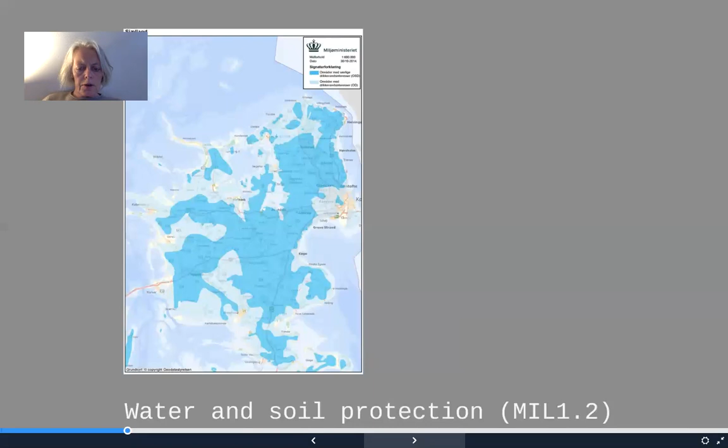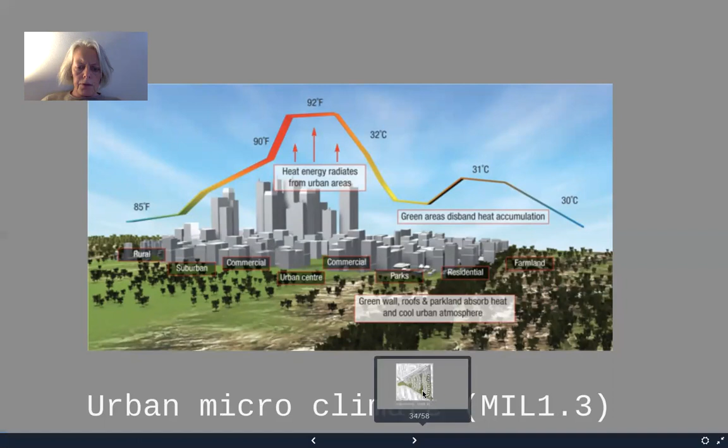The urban microclimate plays a role. We have already been touching upon this when we talked about the heat island effect, the fact that it is warmer in the cities because of all the hard surfaces. They collect heat, and when you have an area in a city that is too warm, then you will have to cool the buildings and use energy for cooling these buildings. So if you can work to actually avoid the heat island effect, then you may also get a higher return in terms of solving environmental problems.

Biodiversity is another aspect. If you can secure a high level of biodiversity, you will also promote the possibilities for producing more vegetables and food in this area. So a strategy in terms of design thinking that promotes all kinds of greenery, facade, plants, trees, bushes, and whatever that support each other in terms of creating a rich biodiversity, then you're also kind of lifting the possibilities for growing vegetables and food in future planning.

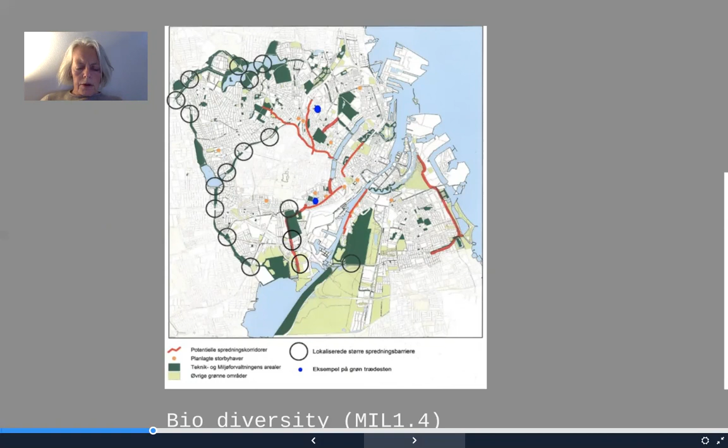So this also gives you points when you want to certify an urban district for sustainability aspects. There can be other impacts that you may want to think of, and you may want to map in a specific case whether there are issues that play specific roles.

It could be about private consumption of people living in that area. It could be about CO2 emissions. It could be about transport and emissions from shipping and energy, agriculture, wastewater, extraction, and fishing. Depending upon the context, there are other issues that play a role and that come from the outside and have an impact upon that area that you are planning.

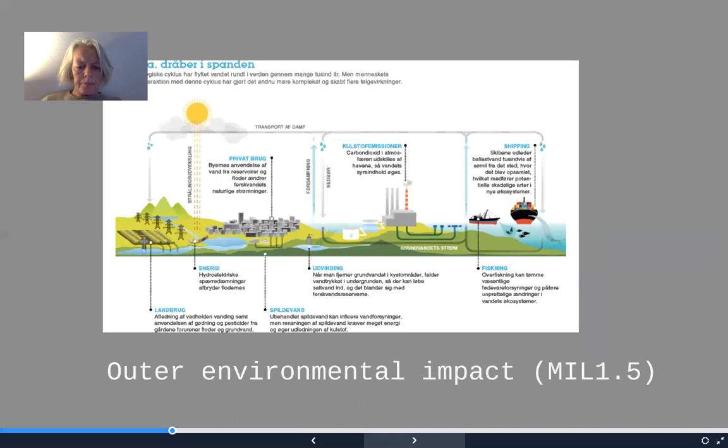How you use the land in the most sustainable, appropriate and environmentally friendly way as possible is an issue that you can be graded for in a sustainability certification. How you promote renewable energy rather than non-renewable energy is also an element of a sustainability documentation. How you use the land in the most energy efficient way is a consideration also.

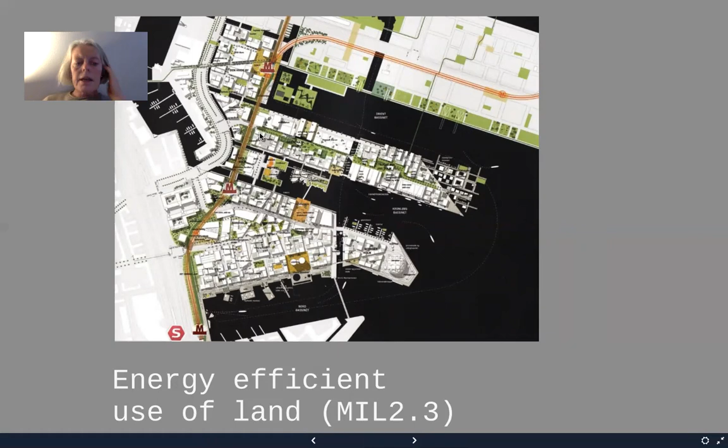This place is Nordhavn, and it has to do with the public transport and how that is optimized as far as possible. How you deal with existing material on the site: can you reuse it, or do you have to get rid of it and take it somewhere else? Is there some kind of circular system that can be to an advantage for the project in this case? And can that also have an impact upon the soil balance in the actual urban development?

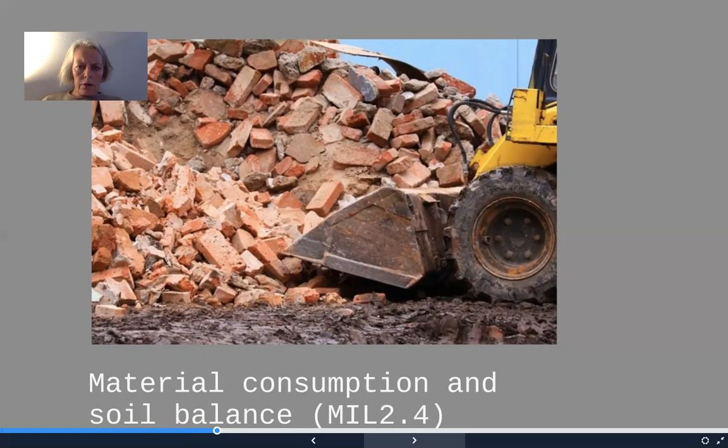As the last issue in regards to environmental quality of an urban area, the possibility and the potential for local food production can also have a positive impact upon the final rating of a sustainability level of an area.

In this case, we are on the top of a parking structure in outer Copenhagen, and a group of people have established this little farmland where they individually and family-wise engage in this project and harvest their own grown vegetables and fruits and berries and so forth over the summer in this roof farm.

We don't have many of them in Denmark. I know there are quite a few in New York, and there are other places in Europe where you can also see local food production. And we're probably going to promote that since we are becoming more and more people in the cities all over the world in the future.

Well, it was not the last. The very last is about water balance. And we have already touched upon that when we talked about climate adaptation and the fact that you, for instance, in a Danish context, have to deal with increasing amounts of rainwater in heavy rains and heavy storms over the summer. You have to be able to deal with the water in the most environmentally friendly way possible.

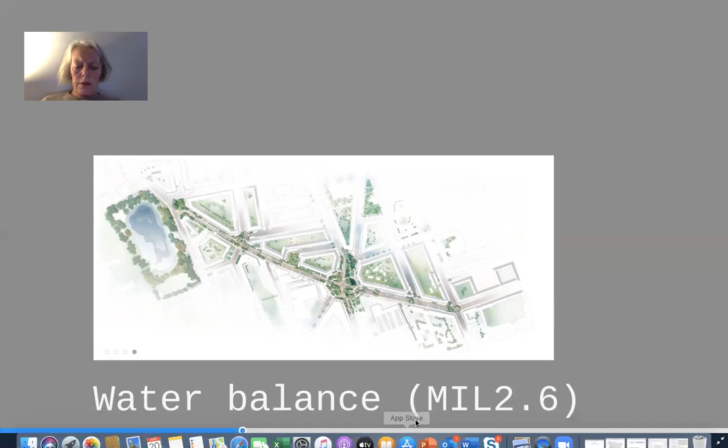So water balance is also an issue that you need to address and be able to document your takes on when you want to get credit for a sustainability certification of an area. Financial quality, besides environmental quality, is another aspect that is going to be dealt with when we talk about sustainable development of urban areas. And in this sense, we're going to touch upon a number of issues.

One of them is life cycle costs. Life cycle cost is the cost, for instance, of a building from when it is being planned, developed, carried out, taken into use, and for the period of time that it is going to be used. So it is a total economy calculation, if you could say so, about a building in an area, for instance.

If you make such calculations, you can make a calculation for an area. You can sum up the different buildings and the things that are going on in this area and estimate what kind of financial value it will create in the future. And those estimations are of importance in order to underline and document the financial impact of a given take or development

in a municipality thinking. So a municipality has an interest in seeing how different moves, different takes, different initiatives all over a city can sum up and be some kind of measurement for the successfulness in regards to creating cities that people want to live in and pay for living in, and also that people would want to care for and maintain and keep going for several years.

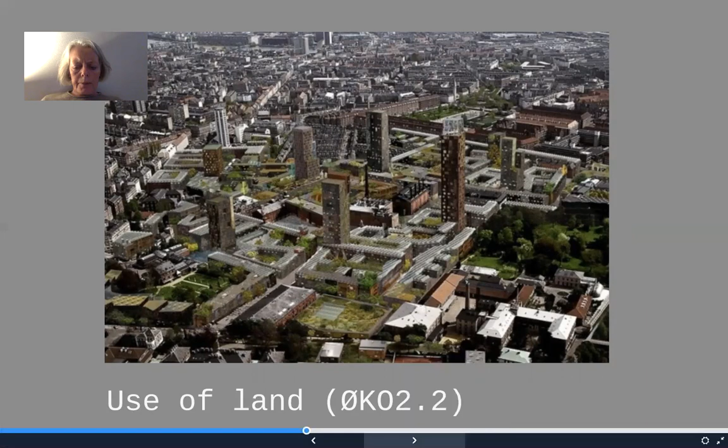All of this also has to do with the social quality. And what you need to know about DGNB is that the financial quality, the environmental quality, and the social quality, they are weighed each. They are alike. They have the same amount of points in creating a sustainable city planning. Financial quality is not more important than social quality, which is not more important than environmental quality. Or you could turn it around and say all three qualities are important to actually support each other. So in this sense, social quality is not less nor more than the other qualities that you need to address.

And therefore, to create a lively city where people find it attractive to live and work, and therefore also want to spend money in and live in and take care of to make it last longer, is also depending upon social quality. And there is a number of different aspects and criteria also in that term. One of them is about establishing social and functional diversity. It can be about creating housing for different segments of people, not only wealthy people or poor people, but actually allowing a good mixture of all kinds of people to create diversity and not create ghettos.

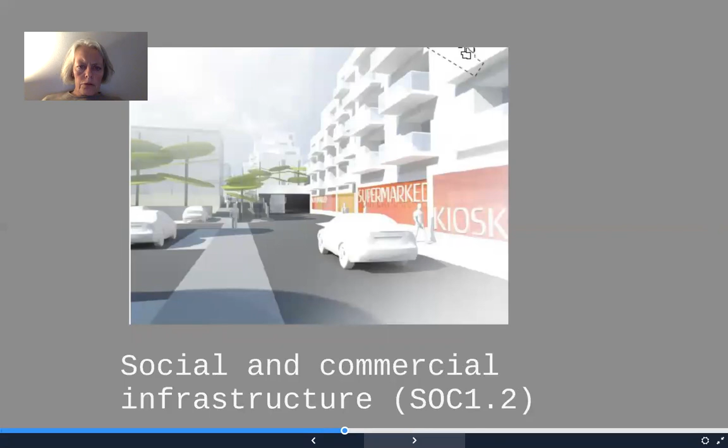To assure the social and commercial infrastructure to take care of people being able to transport themselves, and also being able to park their car so that they don't have to walk like kilometers to find their car and get on from there. So that in that sense, social and commercial infrastructure also supports the creation of a sustainable neighborhood or district.

Safety. Safety means a lot, also in regards to stability and to character and quality of a neighborhood. Therefore, for instance, good lighting, good artificial lighting is an aspect that has high levels of points in sustainability planning to actually support that people do not feel unsafe, but that they rather feel that they are home here and that they can live here and be well here.

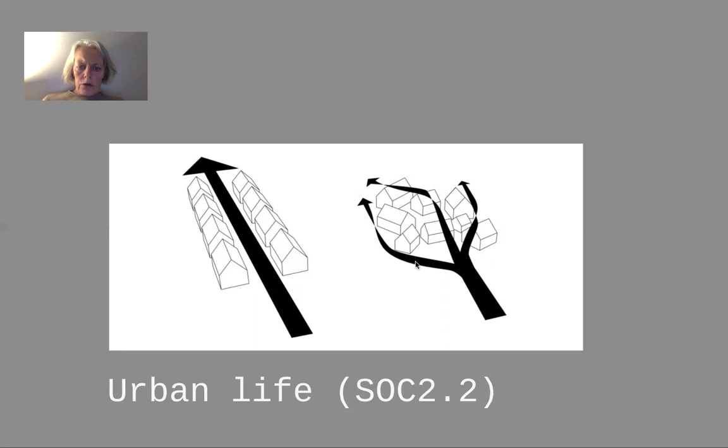How do you organize the urban life? Is it like in this case that you have a long homogeneous way of working through the city, or can you actually achieve something by making it more organic? Your choice of approach will have a significant meaning for how to develop a sustainable city.

Noise, and not least noise reduction. Noise is actually one of the silent, and you couldn't say silent when we talk about noise, but noise is actually a killer. Noise causes a lot of death and causes a lot of illnesses and stress and so forth. So if you can lower noise, you actually also score high in regards to making a sustainable city. Free space is also a quality that is highly valued in order to create a sustainable city.

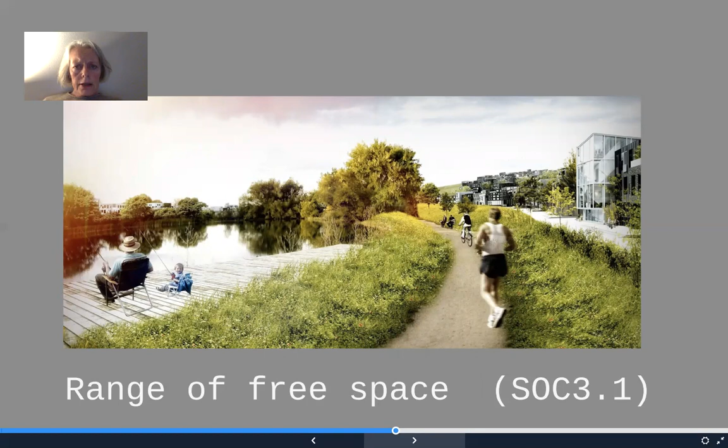Accessibility, how you can, if you are a handicapped person in a wheelchair or blind or don't find it easy to move and so forth, taking care of that and having some design strategies for achieving good accessibility is also an aspect about sustainable planning.

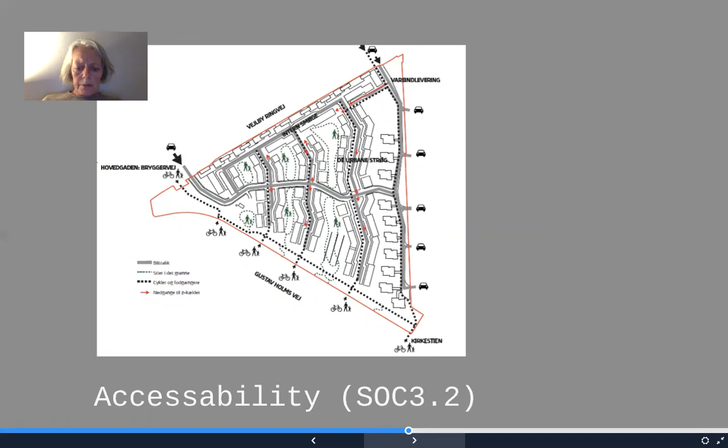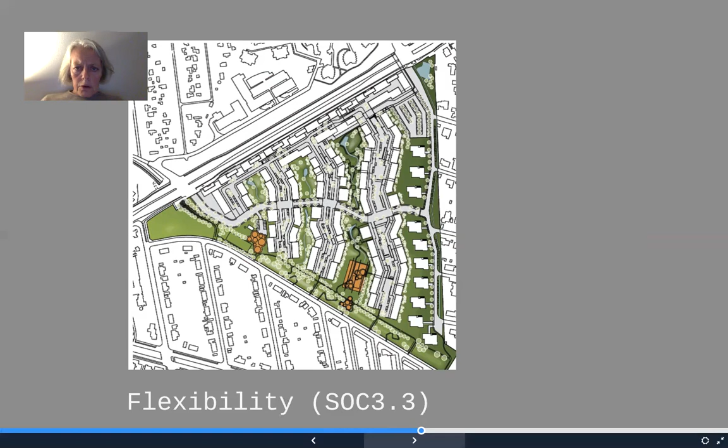Allowing for flexibility, allowing for instance extending or enlarging or reducing your lot or your house so that you can stay in a neighborhood for a lifetime rather than have to move somewhere else. Whenever people move, it costs a lot of resources and expenses. If you can reduce moving around by, for instance, allowing for a bigger flexibility in terms of being able to extend or reduce your home, then you are also in the position where you can score points for that in the sustainable urban planning.

How you work, how you integrate your neighborhood in the surroundings.

Is that seamless, or is it barriers, or is it not barriers? Is there a possible way through here? For instance, like in this case, you can see that here you have roads that come in and meet and allow for the neighboring surroundings to actually also disseminate through here. The way you connect to the surroundings, the way you integrate in the urban setting is also an issue in regards to how to make a sustainable planning.

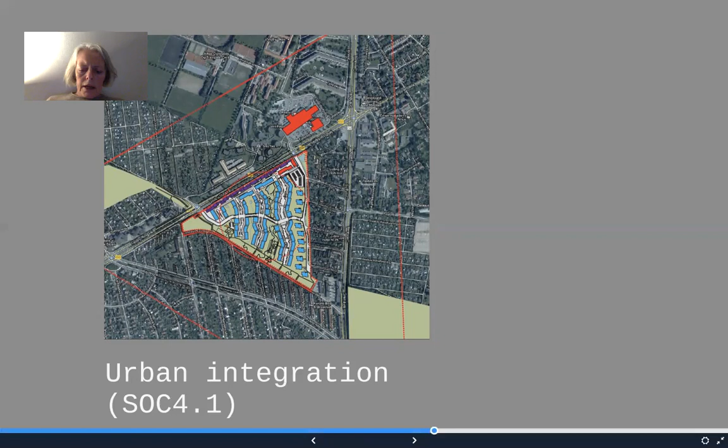How you design your urban fittings. We talked a little bit about that when I showed you the Copenhagen bench. The visual identity, the idea, the character, the homogeneity, how you actually deal with the aesthetics and how you make that work in the urban space is also an element of a sustainable urban planning.

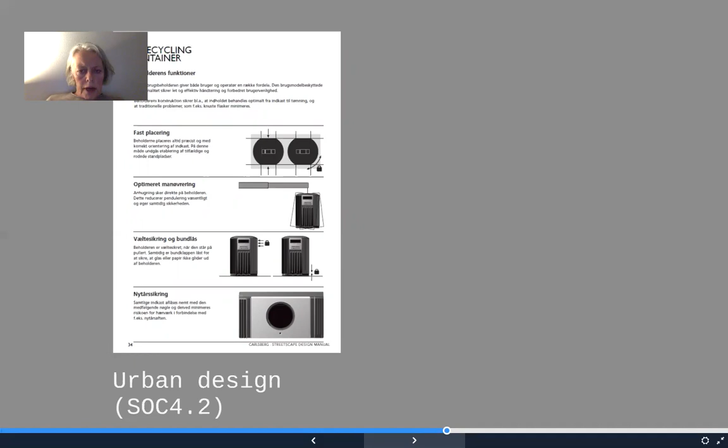And then there is another aspect, and that is about how you actually do this. How do you carry through the planning? How do you involve and how do you define the quality and how do you manage and construct it? A number of aspects connected to involvement of people that are supposed to have their life in this development. What do they want? How can we make it attractive for them? How can we make them take care? How can we create their ownership? How do we actually work this in some kind of co-creation?

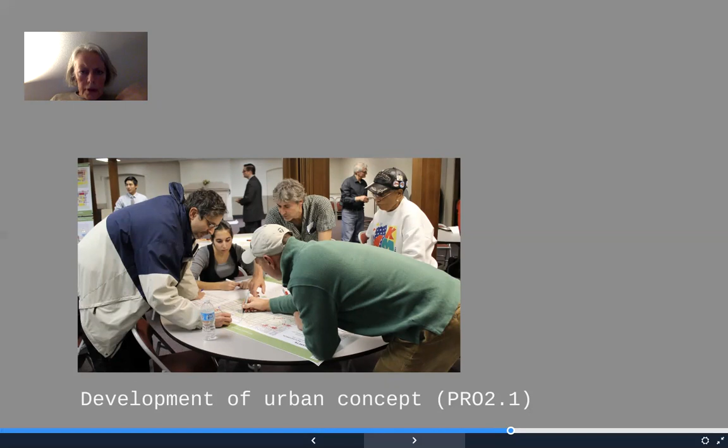How do we develop the urban concept on the basis of interconnection with the surroundings or landscape or water features or trees or character? The faithfulness in regards to the existing quality and so forth, how is that dealt with? And how do we integrate this so as many actors who are going to play a role in this city or neighborhood are involved as early as possible and can give their thoughts and ideas into a proper development of the neighborhood? How can we involve the municipality and make them take ownership to this development?

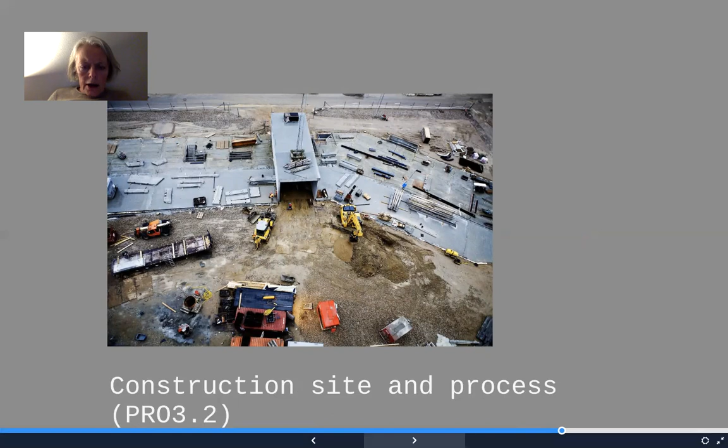How do we develop this so it is manageable with as little resource consumption and as sustainably as ever possible? How do we manage the actual construction site and the process in the most sustainable way? How is that carried out by the entrepreneurs? And how do we actually sell this and communicate it and get people involved in it so that they would also treat this in a sustainable way? And how can we monitor it and work with the experiences that we get from here and improve them and create new patterns that are as sustainable as possible in order to engage and monitor this over the lifetime of it?

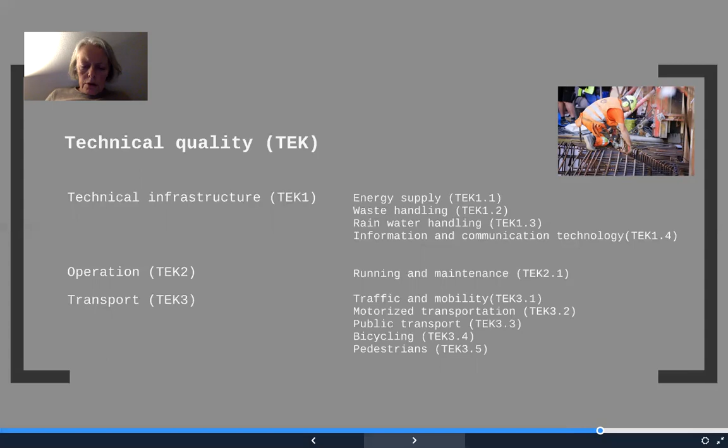Process is actually very important, to be very considerate and very accurate and very foreseeing around how to actually organize the design process and the building process and the running and maintenance process. That is key, and many sustainable issues can be solved if you have a strong methodology for the basic running of the process. And then, of course, also the technical quality as such needs to be in order to make a sustainable urban setting.

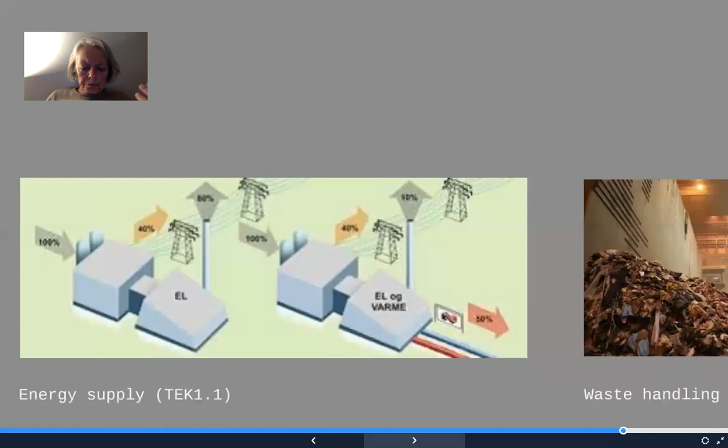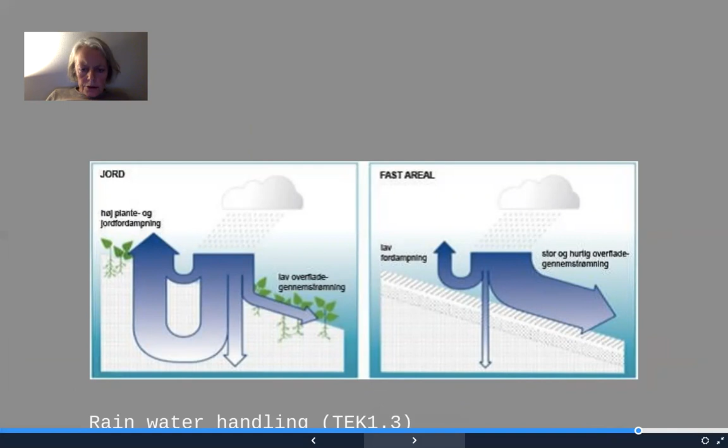How do we have as energy efficient and sustainable energy supply as possible? How do we handle the waste as sustainably as possible? How do we handle the rainwater and technical issues and technical matters? If it is needed to have some kind of information and communication technology, how is that done in the most sustainable manner? And how do we take care of the running and the maintenance in the daily routines so it's done as sustainably as possible?

The way we run the traffic and the mobility, can we do that in a way so that we get as many people as possible out of the car and over into either walking, biking, or using public transportation? How do we support, for instance, electrical cars or bikes so that we can use less fossil fuels and more renewable fuels for cars and bikes and so forth? And how do we actually deal with the public transport? Issues such as these, also bicycling, are playing a big role in how to plan a sustainable city. And taking care also of the pedestrians is really key in order to build a sustainable city.

So recall, DGNB is about 5 approaches: the 3 pillars of the sustainability agenda, the economical and the environmental and the social sustainability. They are equally weighed. And then how to actually carry it out, the process of how to deal with all these 3 aspects, and then the technical quality of it. Those 5 headlines, aspects, ideas or dimensions are the essence of a DGNB certification for sustainable urban districts.